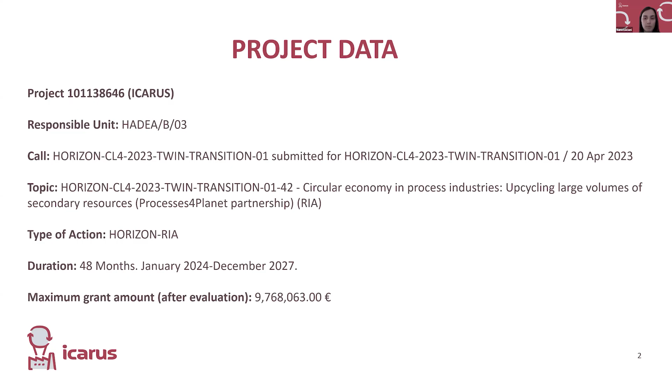ICARUS is fully aligned with the European Circular Economy Action Plan and the ambition of climate neutrality by 2050. Today, only a small fraction of global materials is effectively upcycled, so there is an urgent need for scalable circular solutions. It is important to highlight that the construction sector plays a key role in this transition because it consumes large amounts of raw materials and subsequently generates significant emissions.

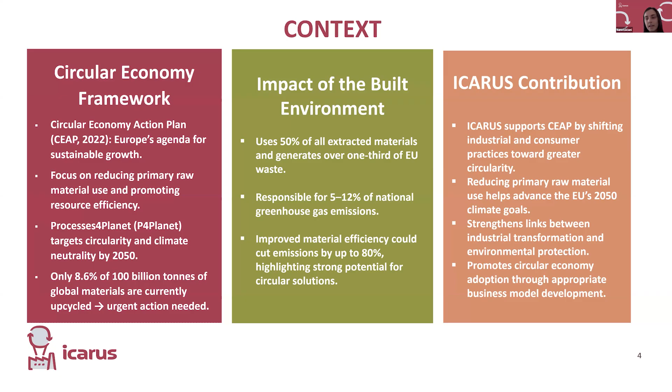Improving material efficiency here can have a strong environmental impact. ICARUS contributes by transforming high volume waste streams into high quality secondary raw materials, specifically for the construction and ceramic industries, supporting both circularity and industrial development. Our main objective within the ICARUS project is to develop and demonstrate innovative technologies that upgrade secondary raw materials to primary quality standards, making them suitable for new industrial use.

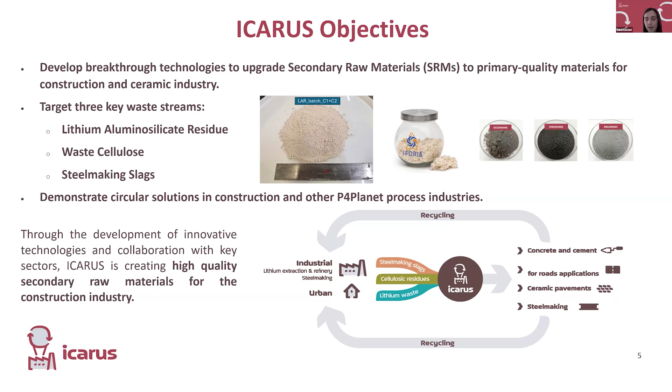The targeted waste streams within the project are lithium aluminosilicate residue, waste cellulose, and steel-making slags. Here are some project key activities. The project integrates separation and upcycling technologies, as well as quality assurance tools, LCA and LCC assessment, but also digital tools and, of course, stakeholder engagement to ensure real market uptake.

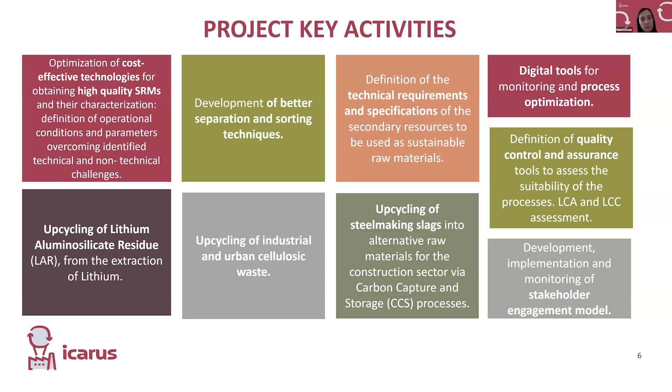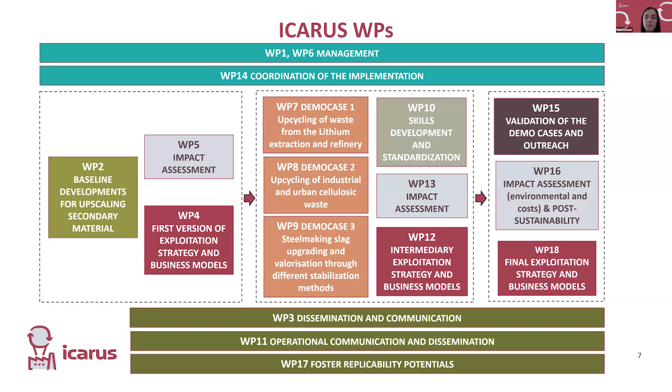These are our work packages. Basically, ICARUS is structured around three demonstration cases: demo case 1 with work package 7, demo case 2 with WP8, and demo case 3 with WP9. Each of them are supported by a specific work package focused on impact assessment, business modeling, and also dissemination and communication activities. So here are our ICARUS demo cases.

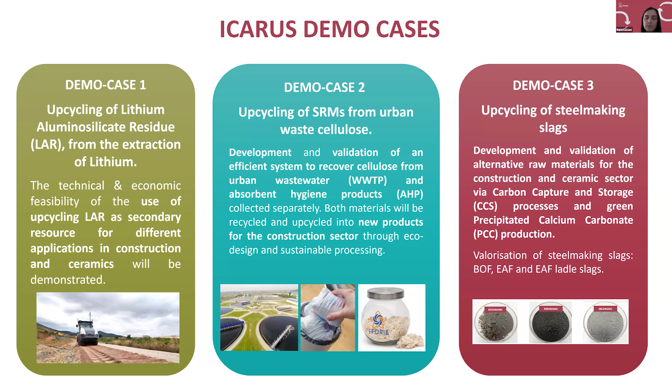The demo cases address three major waste streams. More specifically, demo case 1 is focusing on lithium aluminosilicate residues from lithium extraction. Demo case 2 is focusing on urban and industrial cellulosic waste, while demo case 3 is focusing on waste coming from steelmaking slags. Today, I will focus on demo case 2, dedicated to cellulose recovery.

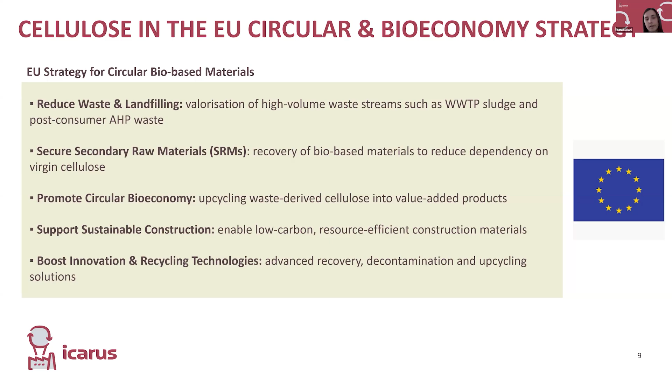But why is cellulose so important? Cellulose plays a strategic and key role in the European circular bioeconomy strategy, reducing waste, securing secondary raw materials in order to reduce dependency on virgin cellulose, which nowadays is mostly imported from extra-EU countries, and also supporting sustainable construction with the development and use of new low carbon construction materials.

This is our main goal within demo case 2 of the ICARUS project. We focus on the recovery and upcycling of cellulose from two major waste streams: sludge from wastewater treatment plants and post-consumer absorbent hygiene products, also called AHP waste, which are basically diapers, nappies, and so on. These two streams represent a largely untapped source of secondary cellulose in Europe, with millions of tons potentially recoverable every year. But despite this, full-scale upcycling is still limited by complex processing routes, energy consumption, end-of-waste uncertainty, and market acceptance concerns related to contaminants.

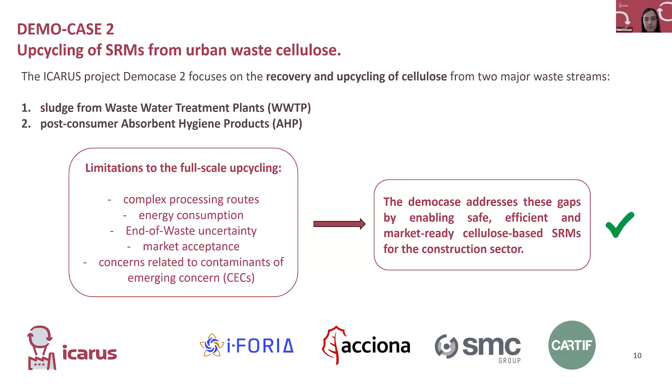So within the project, our work aims to address these barriers and make cellulose-based secondary raw material safe and market ready. In ICARUS, we want to improve recycling and upcycling technologies for recovered cellulose, and then the recovered cellulose will be recycled and upcycled into innovative products in concrete applications in the construction sector through eco-design principles and sustainable processing technologies.

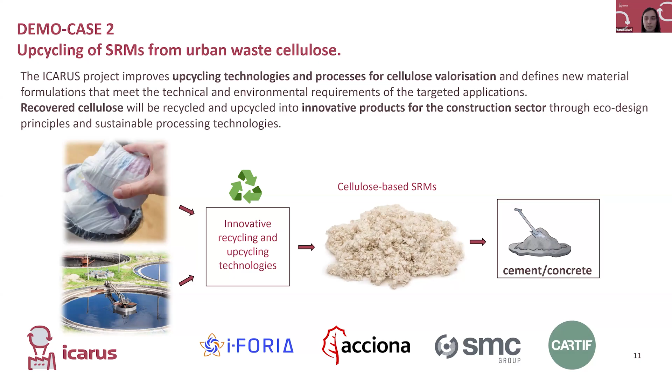To understand why this work is relevant, we need to look at how these waste streams are currently managed. For example, in wastewater treatment plants, cellulose mainly originates from toilet paper, and the potential recovery in Europe is estimated at up to about 4 million tons per year. Currently, this material is degraded together with organic sludge. On the other hand, regarding absorbent hygiene products, around 30 million tons of waste are generated globally every year.

Each ton contains approximately 225 kilograms of cellulose.

Despite separate collection systems already active in several countries, for example in Italy, most of this material is still incinerated or landfilled. It is also remarkable that in Italy, in the Netherlands, and in Belgium there are already end of waste criteria in place for this specific waste.

And finally, regarding cellulose fiber in concrete applications, virgin cellulose fibers are already used nowadays in concrete formulation because they help reduce drying shrinkage cracking, improve crack control, and improve durability. This also supports the reduction of synthetic fibers, for example polypropylene, in construction materials.

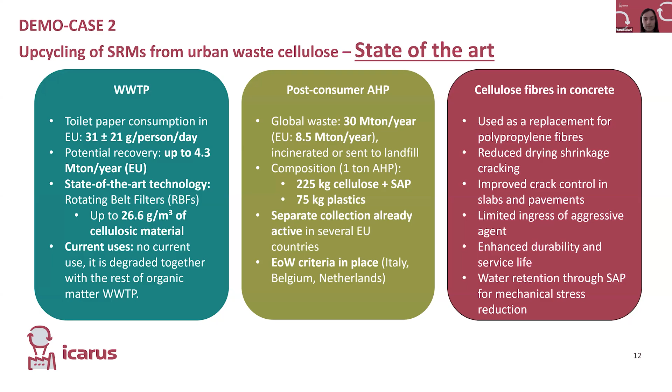We are currently halfway through the project duration, and we can already highlight some important results achieved so far.

Firstly, we have installed a rotating belt filter at the Sant Celoni wastewater treatment plant in Spain, a specific filter able to selectively separate cellulosic sludge from total solids. This system is operational now, and the first recovered samples have been tested with sanitization and upcycling tests, with promising results so far.

In parallel, in Italy, a demo plant for cellulose recovery from AHP waste has been installed and validated. The recycling technology has been successfully validated against the Italian end of waste decree criteria for this specific waste, and this is without doubt a key milestone for regulatory compliance and market uptake.

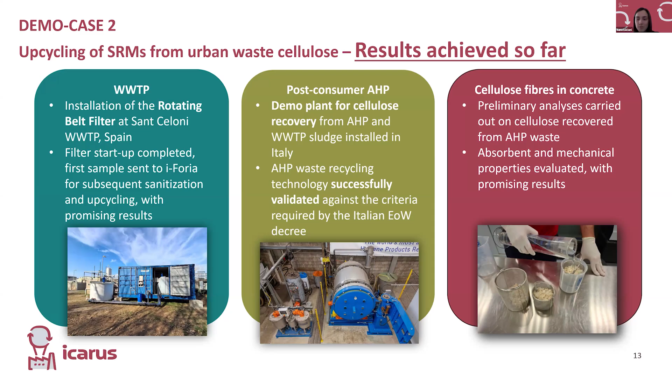Okay, I'll go quickly. Also, recovered cellulose from AHP have already been preliminarily analyzed with promising results.

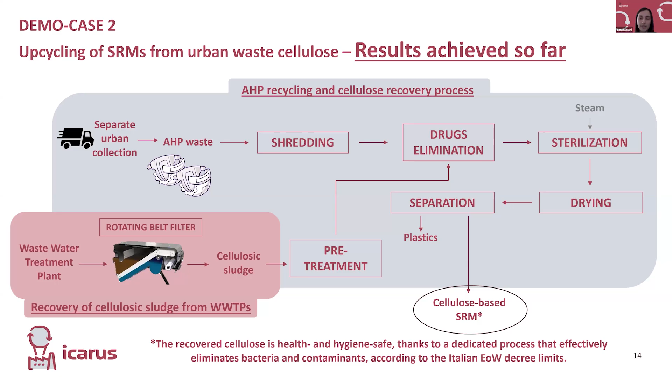This is a quick overview of the AHP recycling process, with important steps of drug elimination and sterilization. The same steps apply for the cellulosic sludge previously recovered from the wastewater treatment plant via the rotating belt filter. The most important thing is that this dedicated treatment ensures the recovered cellulose from both wastes is safe, hygienic, and compliant with end of waste decree criteria.

So looking ahead, our next steps focus on three main directions. We will continue the operation and optimization of the recovery systems, both for the wastewater treatment plant and at the AHP demo facility.

Second, we will further test different cellulose dosages in concrete formulation. And third, we will work on strengthening the regulatory framework, especially laying the foundation for promoting an end of waste decree for wastewater sludge as well, to support wider market adoption across Europe.

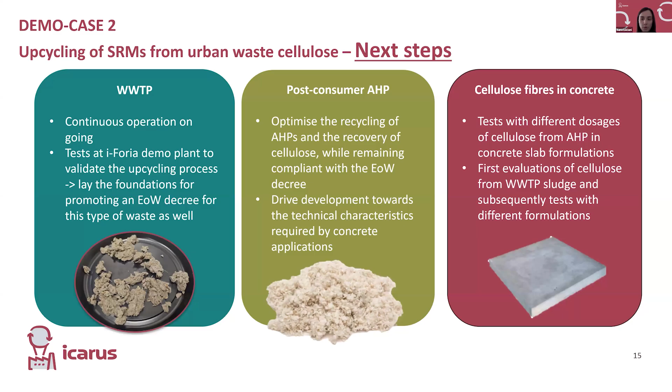Thank you so much. Just a quick reminder, I will have to cut you after 10 minutes so we have more time for the Q&A. But thanks for the very insightful presentation.

Now we move on to the Cornerstone project, and we have with us Cejna Anna Quist-Jensen. She is an associate professor at Aalborg University, Denmark. She earned her PhD degree in 2016 from the Institute on Membrane Technology and University of Calabria, Italy. Her research focuses on novel membrane technologies for water and wastewater treatment, including resource recovery, membrane distillation, membrane-assisted crystallization, and 3D printed membranes. She currently coordinates two Horizon Europe projects: Cornerstone, addressing water, energy, and resource recovery from industrial waste streams, and BeyondBatRec, focusing on sustainable battery recycling. In addition, she contributes to several national and international projects on water and wastewater treatment, and also serves as vice chair of the steering group for the AAU Water Initiative at Aalborg University.

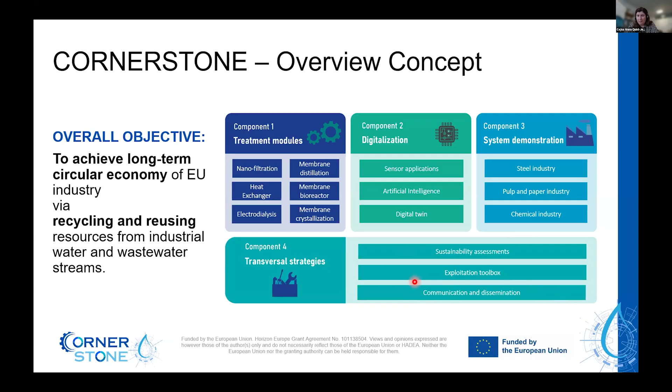And here you can see more detail about the objectives. So what we do is to test these different technologies, treatment modules in lab scale, using the real process streams coming from the industries. And then we integrate these technologies with smart monitoring tools and sensors to be able to control and digitalize the processes.

And then what we are doing right now is to scale these processes up. So integrate the different technologies, integrate them also with the smart monitoring, then scale the technologies up and demonstrate it at 3 different demonstration sites in the steel, pulp and paper, and the chemical industry.

And then, as I also mentioned before, we do the sustainability of our Cornerstone solution, both focusing, of course, on the environmental impact, the economic impact, and also the social dimensions.

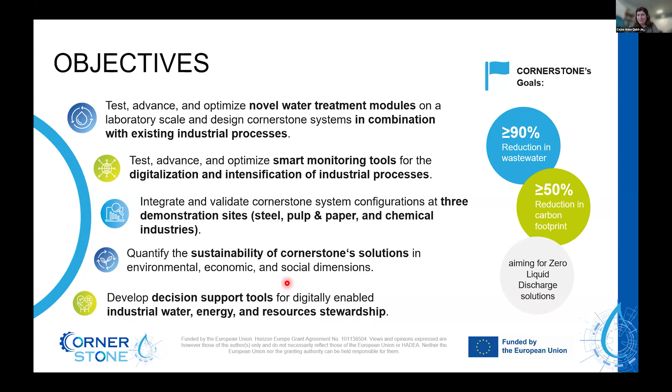And then we develop these decision support tools so we can enable industrial water, energy, and resource stewardship. So it's very important in the Cornerstone project that we look at all these 3 in parallel to see what makes most sense.

And here you can see a little bit more details about the different technologies. So for energy, we focus on 2 technologies. It's heat exchangers for the thermal heat recovery, and then anaerobic membrane reactors for chemical energy recovery, for example, to produce biogas.

And then for water recovery, we focus on nanofiltration and membrane distillation. And for solute recovery, we focus on bipolar electrodialysis for acid-base recovery, and then membrane crystallization to recover some of the metals or minerals in the process streams.

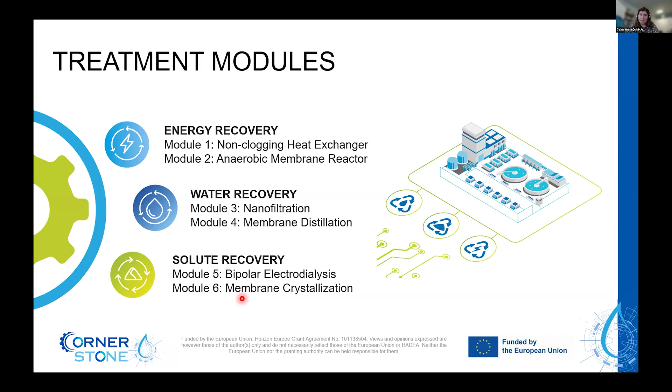And as I mentioned before, we have 3 different case studies. So the first case study is the chemical industry, and here we have a company called Covestro that in our project is located in Germany. And here our focus is chemical energy and water recovery.

And then we also have the steel industry involved, and this company is HKM, also located in Germany. And here we focus on the thermal energy, water and acid recovery.

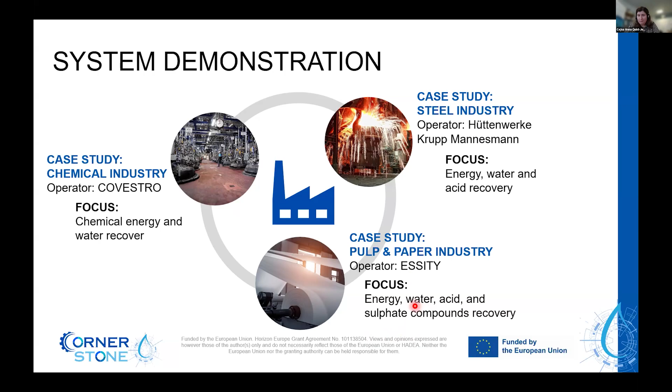And the last one, the pulp and paper industry, where our company is Essity, and the Essity part that we are collaborating with is located in France. And here we also focus on thermal energy, water, acid, and also recovering minerals from their process streams, mainly sulfate compounds.

And a little bit about the digitalization part again. So as I mentioned, we integrate these smart monitoring technologies and sensors to optimize the processes and develop the digital twin. So it's also easier for us to implement it and see, if we change something, what the causes will be, or test different things instead of testing in lab.

And then of course we validate this using real data, both in lab scale but also at the pilot scale.

And another very interesting part of the Cornerstone project is these decision support tools. So how do we actually take the decision on a management level whether we should take one decision over another and so on. There has also been a lot of work talking to industries, not only the industries that are in the Cornerstone project, but also other process industries and industries in general, to see how we enable this water, energy, and resource stewardship.

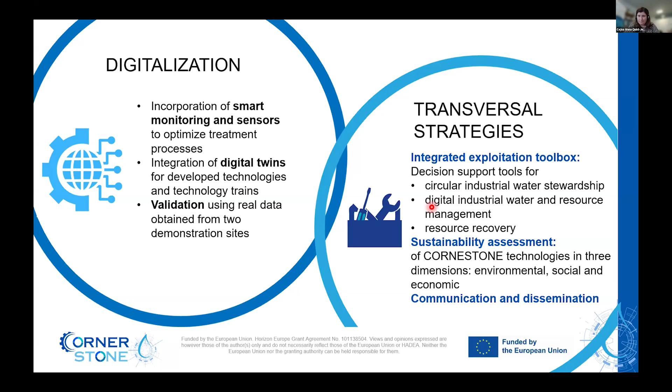So just to focus a little bit about what we do in the pulp and paper industry, here we focus on different technologies for energy recovery, water recovery, and solute recovery.

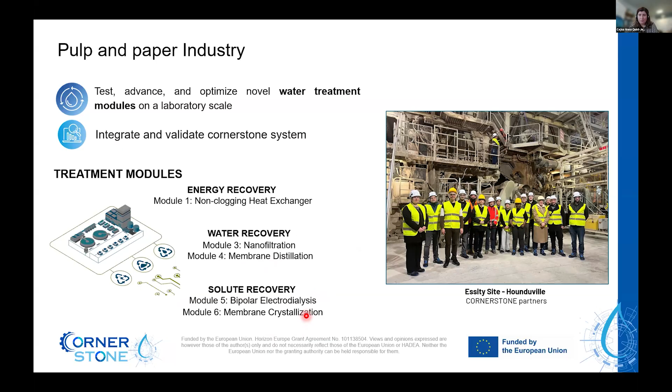We have the non-clogging heat exchanger where we use ultrasound to optimize the heat exchange. And then nanofiltration, because with nanofiltration we can separate bivalent ions from monovalent ions, and with that it's easier for us to recover some of the valuable resources in the feed.

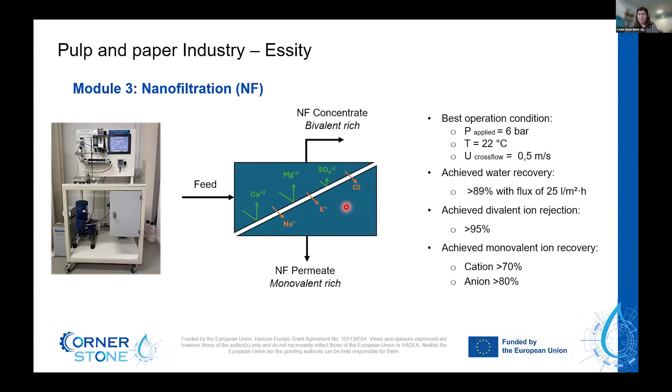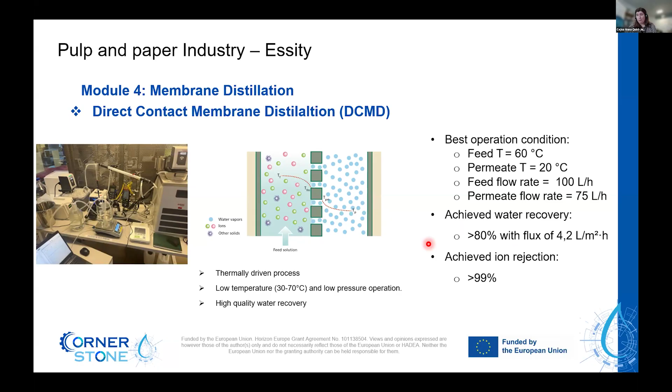We focus on membrane distillation, which is a thermal driven process. Here we can use waste heat to drive this process, and we also obtain very good results where we have more than 80% clean water recovered from the process.

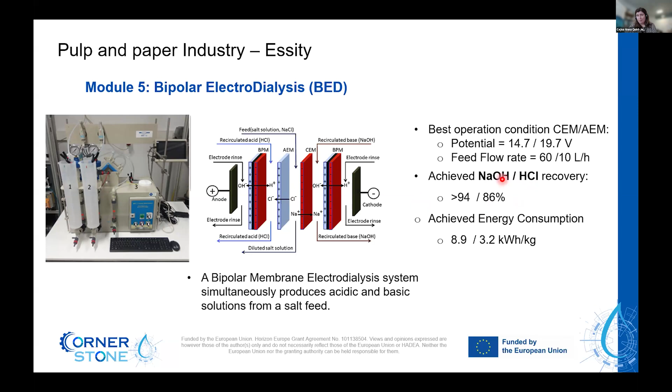We use bipolar electrodialysis where we can also obtain very high sodium hydroxide and HCl recovery rates from the process. And then as a last process, we have membrane crystallization where we can obtain more than 94% very pure water, and at the same time, different minerals, mainly calcium sulfate, but also some calcium carbonate compounds.

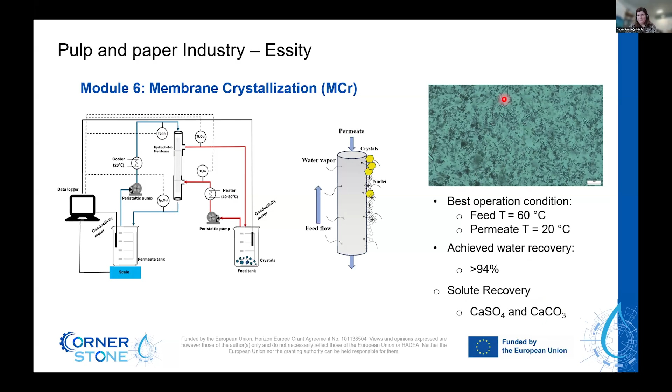Here you can see a picture of some of the crystals. In the last slides, we are now integrating these processes and upscaling them to demonstrate at the actual pulp and paper industry.

A little bit about the concept and what actually Wood2Wood is about. Before I start presenting the project concept, I will tell you a little bit about the incentive, so why Wood2Wood and why we wanted to tackle this thematic.

Of course, this was the huge amount of construction demolition waste that remains untapped and is not reused or recycled. In Europe, this waste stream contains 20 to 30% of materials like wood, making it a key focus of EU waste policy.

So our main focus in Wood2Wood is actually to transform the contaminated wood waste from construction demolition waste and furniture waste into high valuable products. And how are we doing this?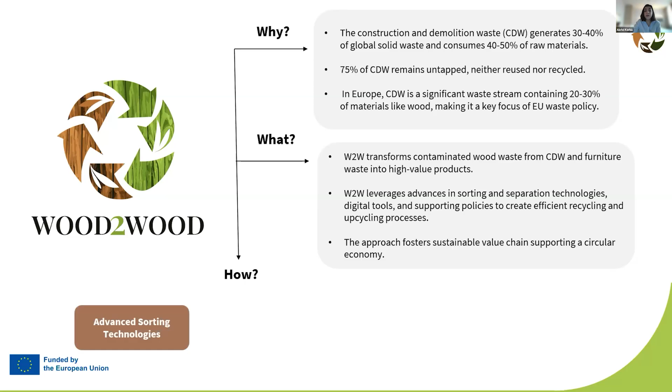We have 4 main pillars of the project. The first one is the advanced sorting technologies that we will use in order to separate the wood out of construction demolition waste and furniture waste.

The second one is the upcycling technologies that we are using in order to transform this wood into valuable products again. Of course, we have some digital tools in order to facilitate the circular flows of the products in this value chain. And a supportive framework in terms of policies, markets, and skills.

The 4 pillars of the project can be better seen in the next slide.

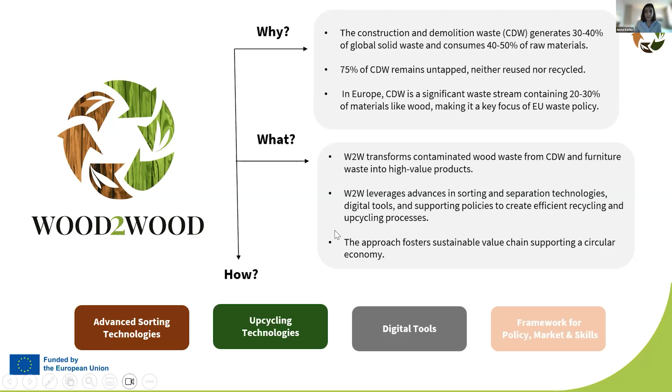Here you can see a schematic representation of the project concept. We start from construction demolition waste and furniture waste.

The first pillar is the sorting and separation technology, separating the wood initially out of the glass and other materials that can be present, and in the second phase, into several wood classes based on the contamination level of the wood. Based on this, we use upcycling technologies to transform the recovered wood into biocomposite materials, polyols, and some surfactants for chemical detergent and self-care products.

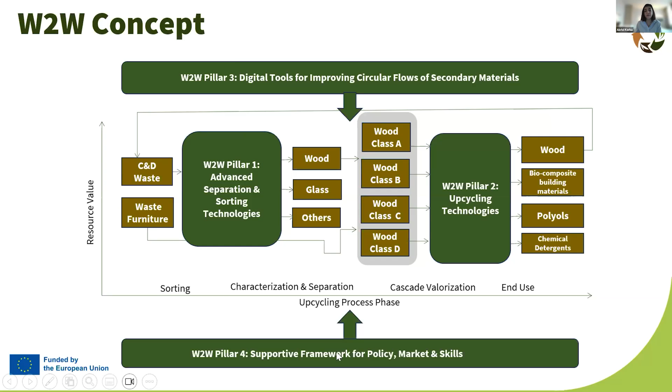You can also see the two supportive pillars: the first is digital tools, to facilitate the flows of materials, and the second is the supportive framework for policies, market, and skills.

Akrivi, you got five minutes.

Thank you very much. Here you can see a brief overview of the project use cases. The first two are related directly to cellulose valorization, which is why I will describe them in detail right after. The third one is about energy recovery, using gasification processes and using the CO2 for the production of surfactants for healthcare products and for detergents.

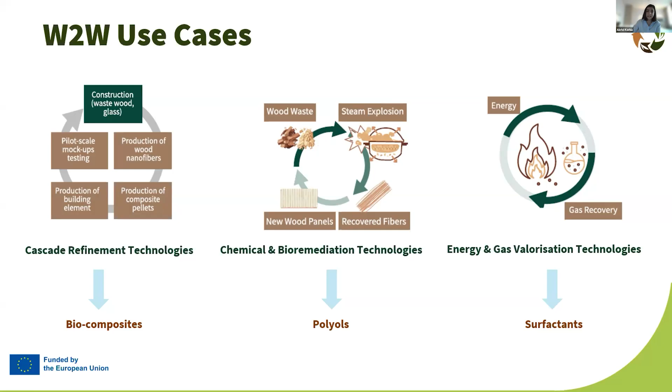The other two I will get into detail on in the next slides, and they are directly about cellulose valorization. In the first pilot and first use case of this project, we start from wood waste and take the lignocellulose biomass, separating the cellulose, the hemicellulose, and the lignin, and we produce nanofibers.

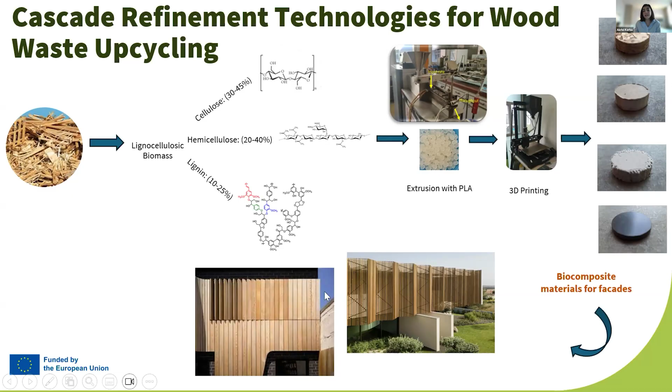We combine these nanofibers with PLA, do extrusion, and through 3D printing, we prepare biocomposite materials. These biocomposite materials can be used in wood facades, so we would like to validate their performance in these kinds of applications.

In the next slide, you can see a little bit about the chemistry and the process we use in this pilot in order to extract specifically the cellulose, but I won't go into details about that.

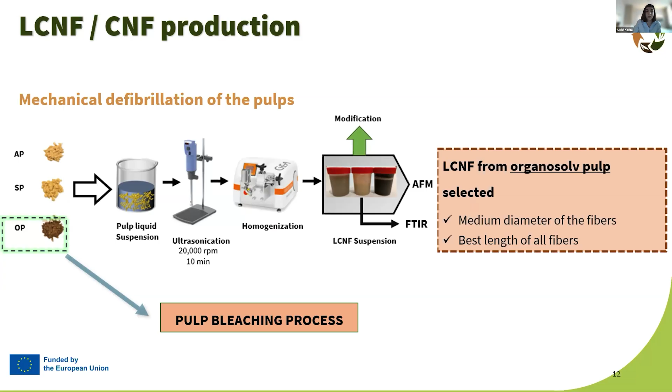I will move to the second use case, where again starting with wood waste and different types of wood, we do processes like steam explosion in order to get the glues and the paints out of the wood waste, along with some mycoremediation processes.

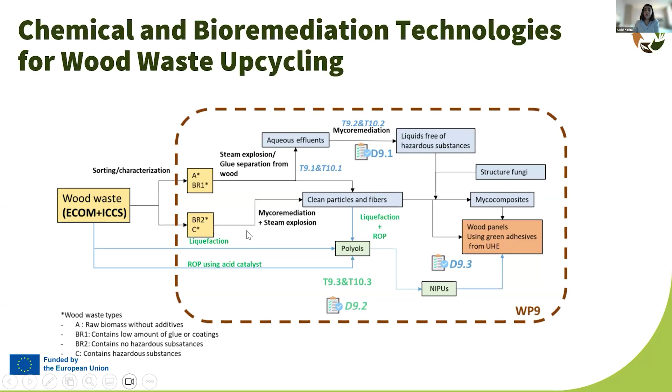Using these processes, we get clean wood fibers that we use for the production of mycocomposite materials and some wood panels. In the same use case, we are also producing polyols through a liquefaction process that can be used for the production of non-isocyanate polyurethanes.

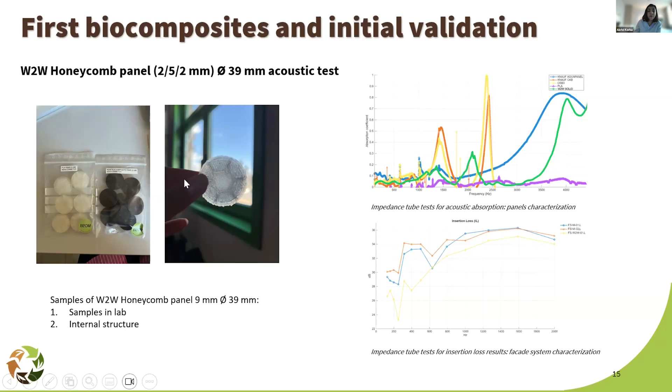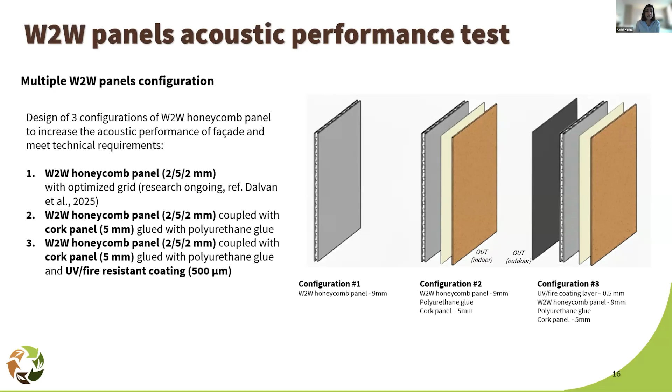Some results we already have in terms of cellulose valorization: in the first pilot, we already have the first biocomposite material, which is a honeycomb panel. This is how it looks right now. We have three different combinations, three different panels to test, and we are now in the process of validating the performance of these panels in wood facades.

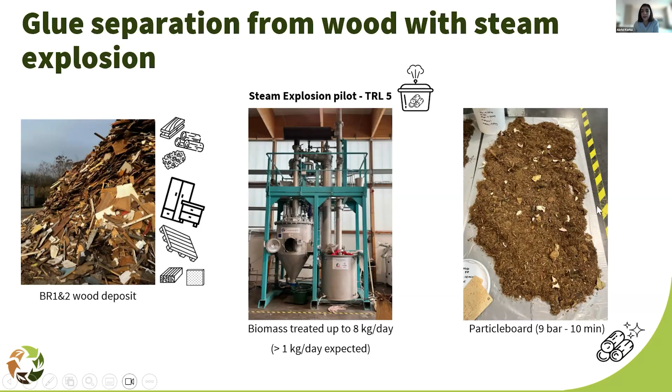Here in this slide, you can see the second pilot. You can see the steam explosion setup and the materials we get right after, which are clean wood fibers, and how we use these fibers.

In order to get particle boards, here you can see the first particle board we created from the steam-exploded fibers, combined with some glues that we also produced in this use case.

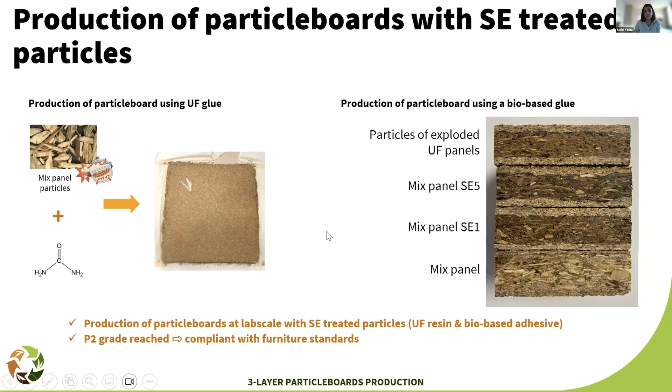Last but not least, I'd like to refer to the advanced sorting and classification system that we are developing at ICCS in our premises, in order to increase the amount of wood waste and wood that we recover.

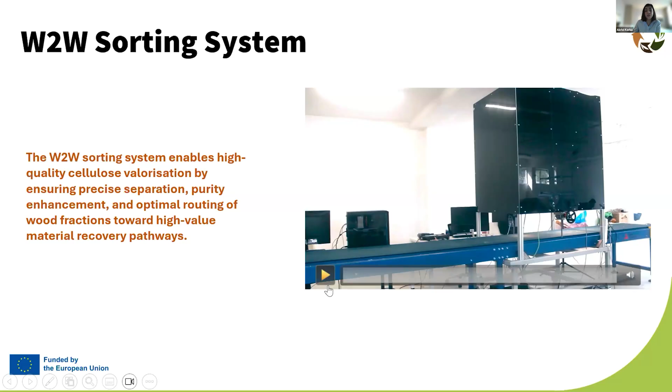I will show you a short video of how this is working. You can see here that we have several sensors and robots in order to separate the wood into classes and in terms of contamination.

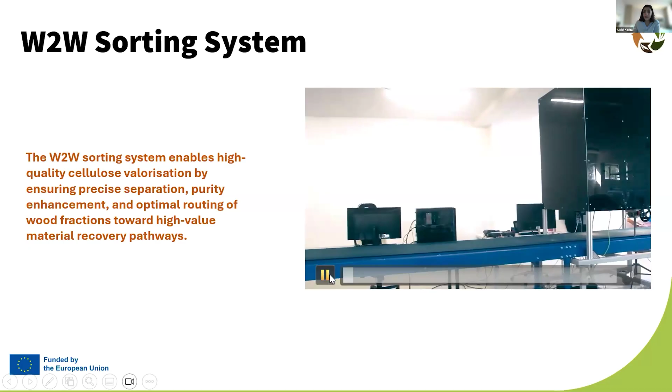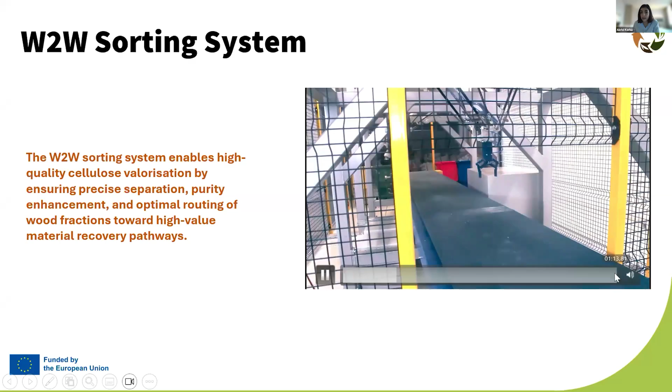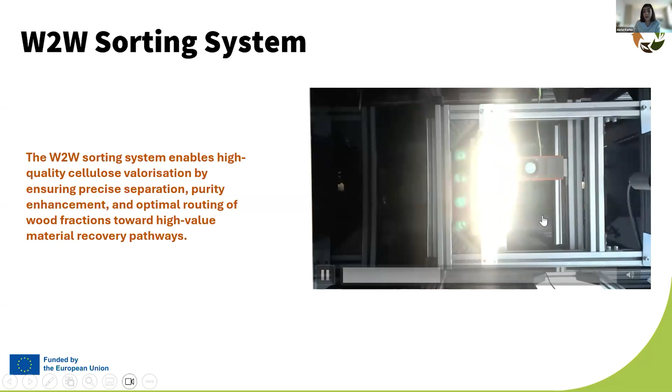Here you can see the big conveyor belt, and here are some robots, Delta robots, for the actual sorting of the wood. You will also see some wood panels passing through, and these are the sensors we use for sensing foreign materials on the wood.

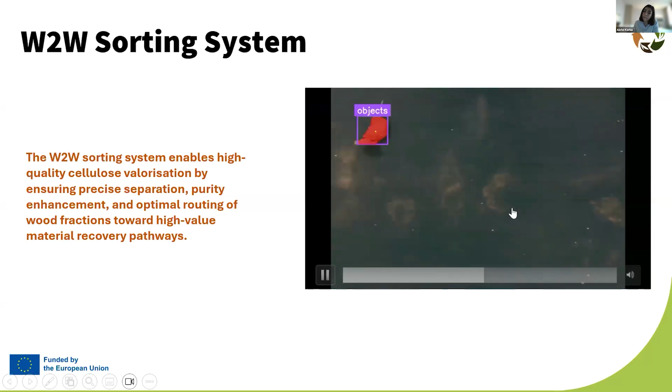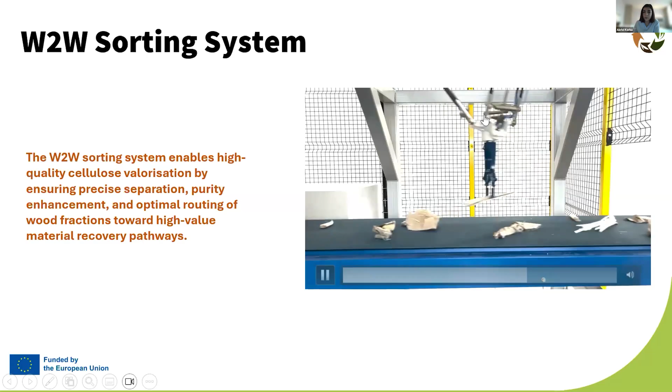These are the cameras sensing the wood and several objects on the conveyor belt, and based on this input, the robots separate the wood into classes.

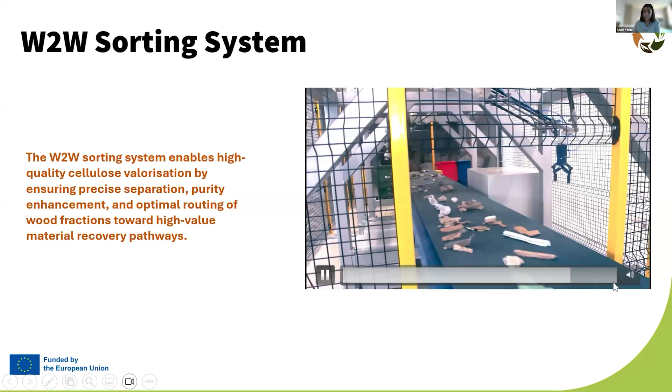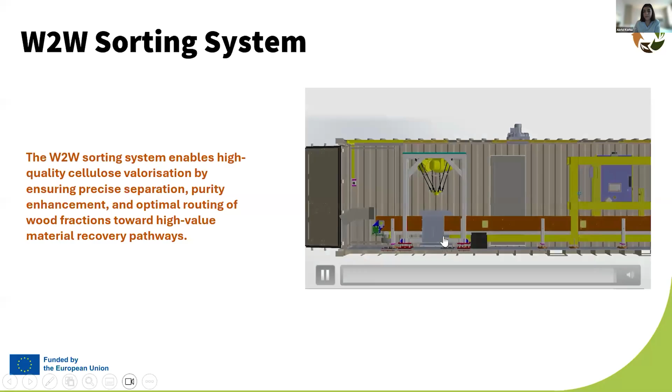And this is a schematic of the whole setup. And that was all from my side.

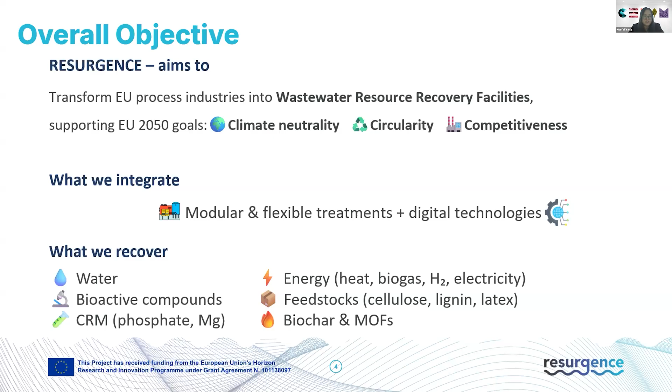Our main objective is to help the transformation of European process industries into wastewater and resource recovery facilities, fully aligned with the European 2050 goals for climate neutrality, circularity, and competitiveness. To do this, we are integrating modular and flexible treatments with digital technologies, and we are recovering water, energy, and valuable resources in our project.

Our core strategic framework is what we call seeds of hubs for circularity. We can think of it as an ecosystem growing. First, we plant the seeds, which are the individual circular solutions, and these seeds then grow into pilots, which are integrated industrial systems where different solutions start to connect. Finally, these pilots mature into hubs for circularity with large-scale self-sustaining industrial and urban symbiosis.

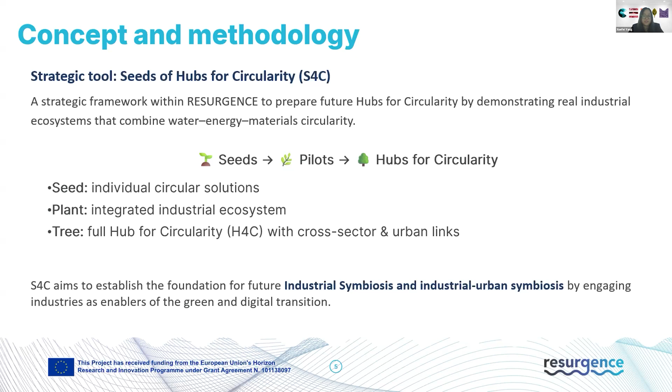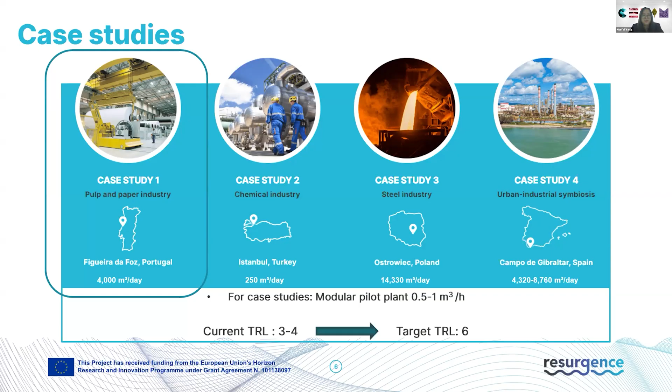Our technologies are being validated in 4 real industrial case studies. The first one is Navigator, a pulp and paper industry located in Portugal. The second one is Organikimya, a chemical industry in Turkey. The third one is Celsa, Poland, a steel industry. And the last one is an urban industrial symbiosis operated by Aqualia. Today we are going to focus on the first case study, the pulp and paper industry.

We will increase water recovery up to 95%. Additionally, the recovery of different feedstocks, along with the conversion of sludge into biopolymers and biochar, will support the industry's goal of minimizing waste. Today we are going to focus on cellulose recovery.

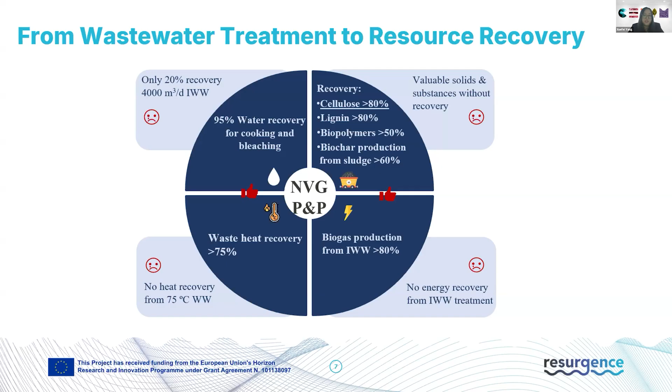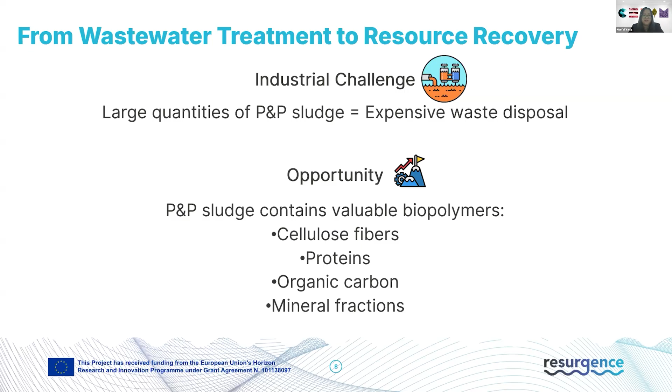Regarding the pulp and paper sludge valorization, the challenge is clear. The sector generates great quantities of sludge, and traditionally this is treated as waste, an expensive problem to dispose of. But if we look closely, this isn't just waste, it's a complex mixture containing valuable biopolymers, including cellulose.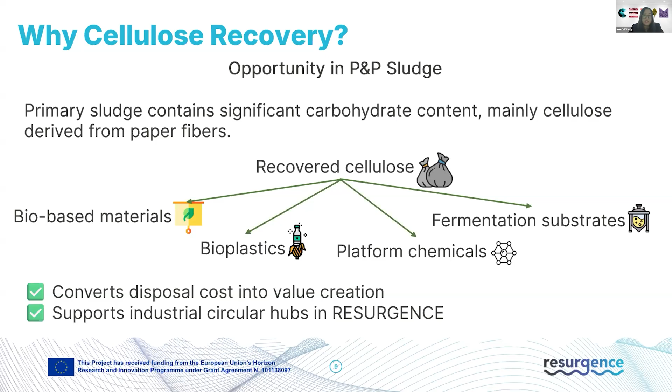So why focus on cellulose recovery? The sludge from the pulp and paper industry, especially the primary sludge, is a treasure of carbohydrate content, largely in the form of high-quality cellulose fibers. By recovering this, we are not just solving a problem of waste disposal, we are creating a new value stream. This recovered cellulose could be the starting point for a whole new range of bio-based products, from sustainable materials, bioplastics, to platform chemicals and fermentation substrates.

So how do we efficiently and sustainably extract cellulose from the sludge? In Resurgence, our key technology is the use of ionic liquids. They are liquid salts at low temperatures, below 100 degrees. They are composed entirely of ions, an organic cation, and an organic or inorganic anion.

What makes them effective and green for our application? Well, first, they have negligible vapor pressure, meaning they don't emit volatile organic compounds, and they are thermally stable. Importantly, their solvent properties can be designed by changing the combination of cation and anion. This allows us to design an ionic liquid that is highly selective for dissolving cellulose, leaving other compounds behind.

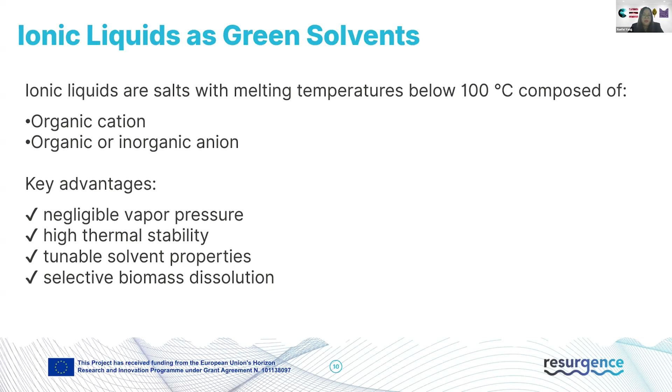Before we apply the ionic liquids, we needed to understand our starting material. In Resurgence, we worked with 2 types of sludges from our industrial partner. First, the sludge was dried and prepared, and then we characterized them. The results confirmed our target: the primary sludge is a rich source containing around 30% cellulose, and the biological sludge from the secondary treatment has a much lower cellulose content, only around 2%, which is as expected.

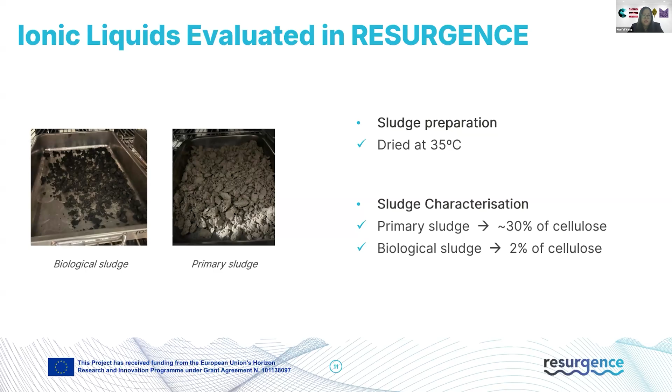And with our target identified, we are now in the process of selecting and testing the best ionic liquids for the job. We are evaluating two types of ionic liquids: a commercial one, and we are synthesizing another one in lab scale.

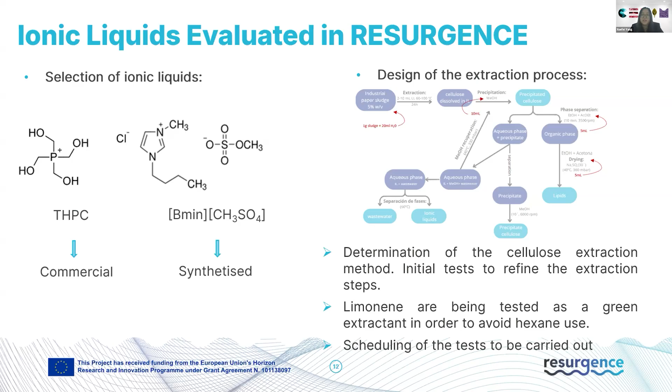A critical part of our methodology is the entire process design. We are developing the extraction steps, but we are also focusing on what happens after extraction. We are testing limonene, a bio-based solvent, as a green extractant to recover the cellulose from the ionic liquid. Importantly, we are designing every step with the final goal in mind: to be able to recover and reuse the ionic liquid itself, making the whole process circular and economically viable.

By the end of this work, we are expecting to develop and prove tailored ionic liquids that can selectively recover over 80% of the cellulose from industrial sludge. We will have demonstrated that these solvents can be effectively recovered and reapplied, making the process economical. The direct results will demonstrate a great reduction in sludge disposal costs and the creation of a new high-value product stream.